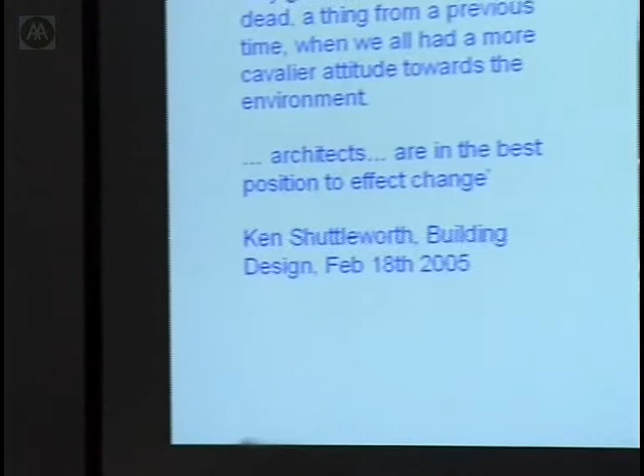We have a mountain to climb in terms of, really, I suppose, facing up or addressing this as an issue. And I think actually a large part of North American society is in denial.

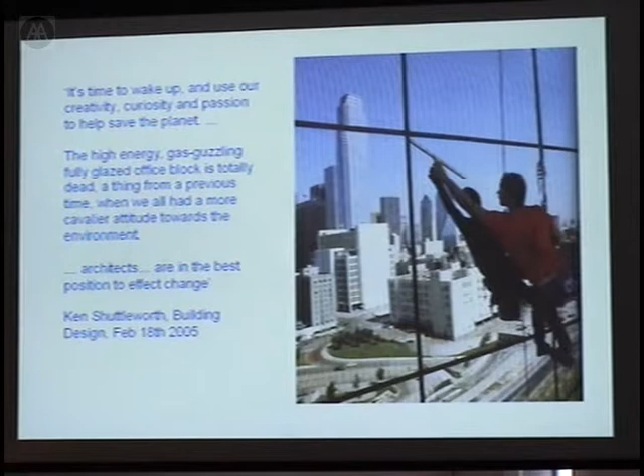Now, the statements from politicians really are rather jaundiced and, like many, rather cynical. But statements like this from a very prominent architect, Ken Shuttleworth, ex, of course, of Foster's, do encourage me, I think. Because here is someone who's very prominent and he's addressing some of the issues that we recognize as being problematic. We may not agree with his analysis, but at least he's saying something passionate about addressing the problem. And he, in this BD article, he ended up saying architects are in the best position to effect change.

But this leaves the question of how, and I think this is the main thing that I want to address, that very often we've been beaten over the head very professionally by Sue and Simos giving us a picture of the problems ahead. But the problem with beating people over the head is that everybody then ends up feeling guilty and inadequate. So rather than leaving people feeling guilty and inadequate, we must begin to address the issue of how we tackle the problem. Because we know architectural students, architects in general, aren't getting it. They're not getting it in general.

Why? Well, maybe it actually has something to do with us and in our approach to the way we impart knowledge and skills and how we crucially integrate this in the design process. And for me, the major issue is how we do integrate our knowledge and newfound skills into the design process. So how we improve knowledge and skills, we've got to, I believe, also promote an evidence-based approach to part of that design process. Now, this is anathema, actually, to many architects.

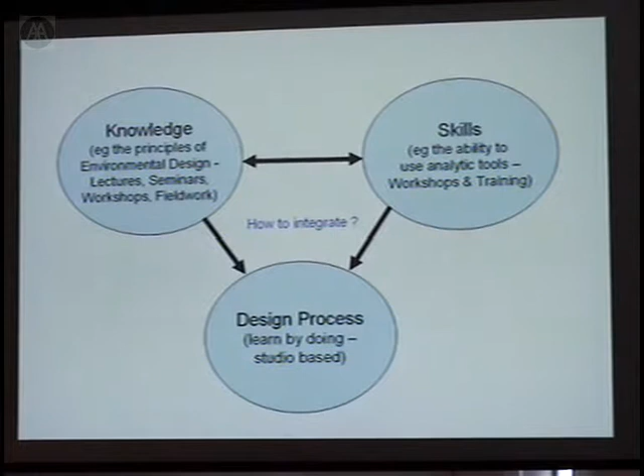And I say that also being involved. I'll come in a minute to a design module that I'm involved in at Nottingham. Anyway, my point here is that one of the critical issues is how we engage with the design process. The broader subject is what we might call sustainable design. I'm referring to what might be a part of that here in environmental design. And how do we integrate the environmental design knowledge and skills within the studio?

Well, firstly, like most design projects, we need to understand the context. I'll come on to a little illustration of all these points in a minute. We also need to understand profoundly the site and microclimate, and it's amazing how often both context and site and microclimate are ignored when setting design projects in the studio.

Thirdly, if we're trying to really understand the environmental design opportunity within a new building, then we need to define or at least understand the environmental design criteria which are pertinent to the problem. So, for example, what lighting conditions are appropriate for a particular activity? Not just the quantity of light, but what is the quality, perhaps, of the light that one wants to achieve in a particular space. And we need to have that up front. That's part of analysing the brief, really.

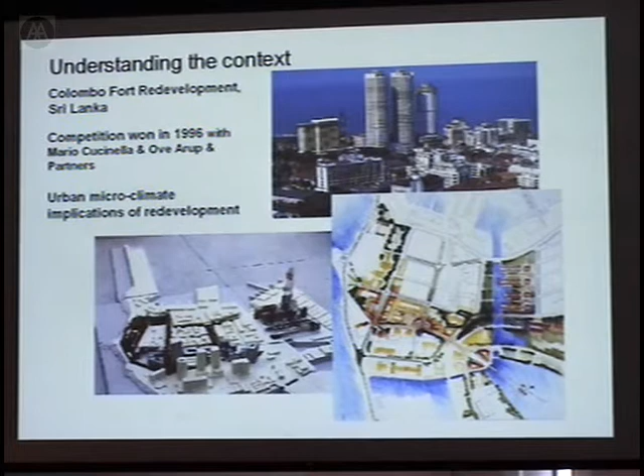Right, site and microclimate analysis. Well, yes, we do that, don't we? Or do we? Again, when we have a site, sometimes we see the perimeter as being bounded by the plot of land that the developer or client has identified, and we don't look at the wider site, which is, of course, the city environment.

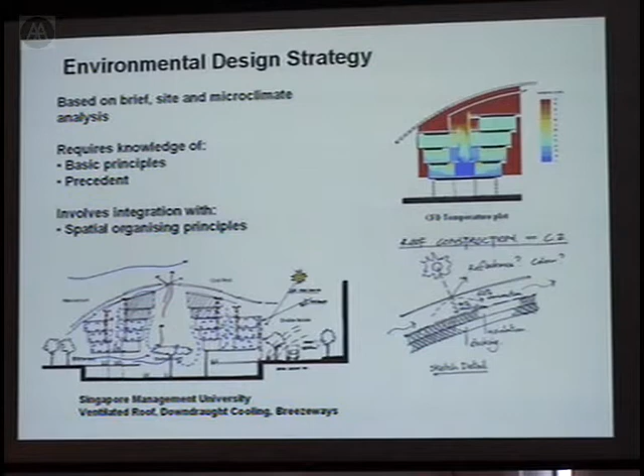So, we've developed, this is a highly hurried up process, but we've got our environmental strategy, which we're beginning to believe in. We want to test it and see whether it works.

Well, of course, now this is where all the tools that Simos and colleagues have been teaching you about enable you to begin to see whether the strategy works or not. And we now are very fortunate in having a fantastic raft of tools at our disposal in order to do this analysis.

Both of the individual building, but also at an urban scale. And increasingly, of course, this will be a very important part of your armory in persuading your client that it works, but also persuading the planners that it's going to be acceptable in the context of the wider city.

And this is becoming a more important part of the agenda, that planning authorities - and there was a recent publication of a sustainable plan for the borough of Newham in East London - but increasingly the London boroughs are mapping out the criteria for new development, and actually convincing them is going to be very significant.

So actually we are beginning to have more power on our side, that in practice architects are being forced to address these issues because it's a planning issue, it's a planning concern.

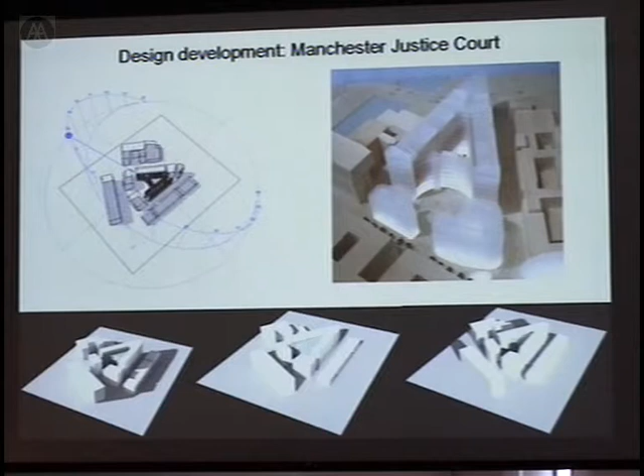So yeah, testing the strategy, design development. Well, this is a very quick run through, again illustrating a process of development in a project we worked with John Pringle and Pringle Richards Sharratt for the Manchester Justice Court.

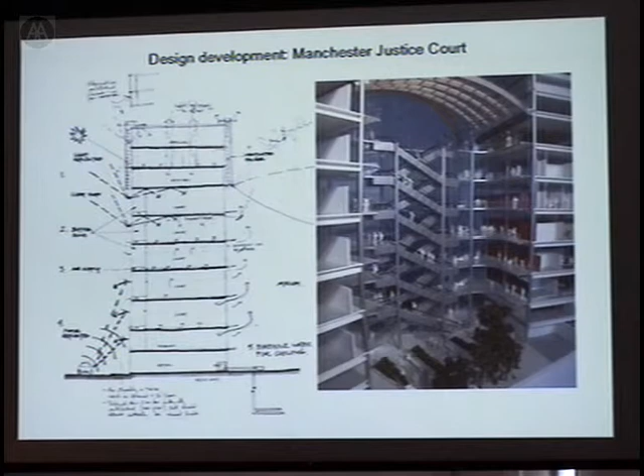Looking initially at the block modelling in relation to the site, how that affects shading, etc. Then looking a bit more detail at initial sketches of how we might respond to that context in terms of the density of the site, what we had to get on it, etc. Then refining that a little bit further - how do we get the air into the floor, how do we cross the building, how do we control sunlight, all those things.

And then further down to the individual room level, and then beginning to look actually at dimensioning it. And of course this process requires a great deal of commitment to the original strategy.

You have to hang on to it and fight for it, because progressively through the course of the structure people will nibble and nibble away at it, and you have to be convinced that your idea works, totally convinced, and you have to also completely convince your colleagues, otherwise it's not going to get there.

M&E engineers are going to come in and they want to fill, for example, this floor void. They'll want to fill the floor void with ductwork or something, or the structural engineer will. You've got to have all these guys on board, because if they're not, they'll find reasons for making it not work.

And my principle is - and I used to have lots of arguments with Alan Short about this, and it's painful and horrible, and you're nearly at blows with each other - he'd say it can't be like this. And I'd say, well, but it's got to work. And he'd say, yes, but not like that. And I'd say, but it's still got to work. And so gradually you kind of dance around each other, and then hopefully you get somewhere where it's beautiful and it works.

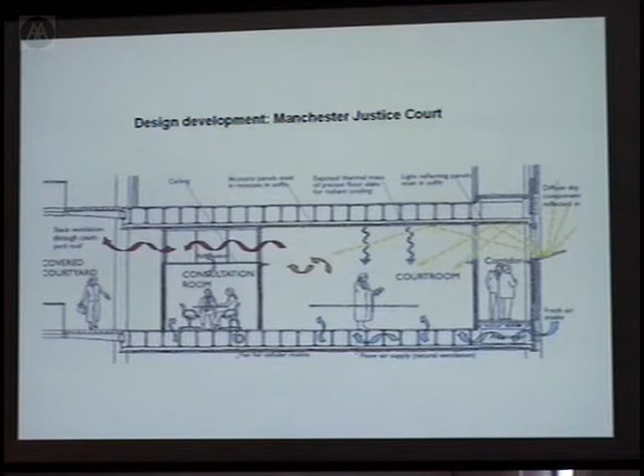Well, I suppose I've extracted this from our mission statement, which is a bit kind of strange, but we hope to produce - I hold my hand out - graduates equipped to meet the contemporary challenges facing the built environment professions. And we hope to have staff engaged in leading edge research, etc. Well, we do, and we are, and we do.

And part of that is a very strong commitment, and it is historical at Nottingham - an historical commitment to cross-disciplinary teaching and research. And so there's a very strong engagement of engineering and building physicists with architecture, and vice versa. So there is that strong engagement.

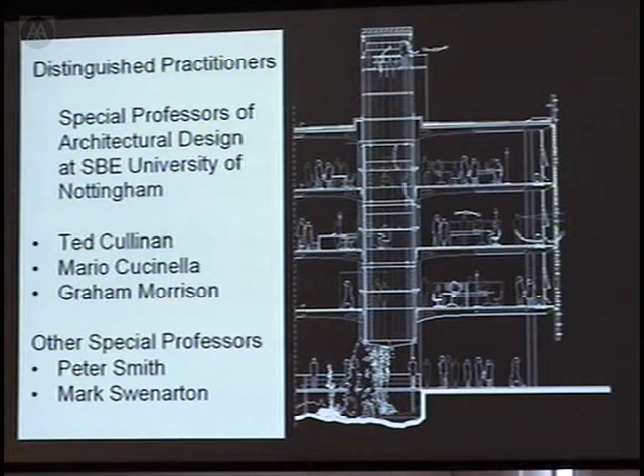We have also appointed other special professors to provide leadership in other areas of the school. In parallel with that, I feel it's fundamentally important that architectural education is grounded in or strongly linked with practice. I say that absolutely committed to that, because if it's not linked to practice, then we're in danger of going up a very narrow alleyway.

I've lost my thread a bit.

Links with the professions and industry, I think, are fundamental, because practice can inform education. It must. We're dependent on the engagement of part-time practitioners in the process of education, of course. But equally, I'm sure one reason why many practitioners do engage in architectural education is because they get a lot back. So it's a two-way process.

As Alexis was saying this morning, it's a combination of both theory and practice, and we need the two. But my strong belief is if it's too strongly theory-based, we're in big trouble.

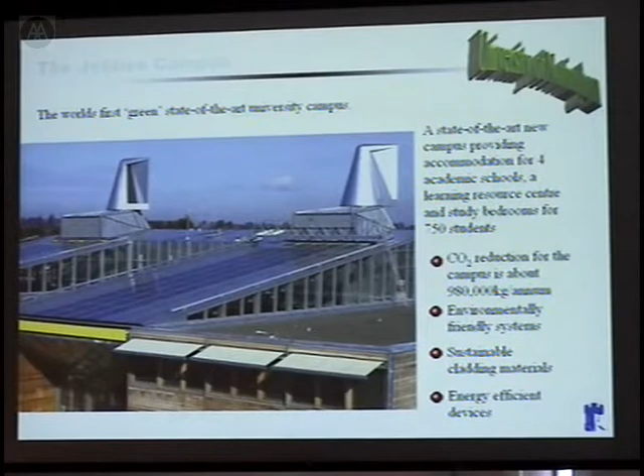Now, how much time have I? I've probably overrun, haven't I? Yeah, wildly, right. I won't tell you about the Jubilee campus, but you can all come and visit it.

I will just very briefly tell you about a symposium we're having on April the 5th, which addresses these issues in perhaps a wider context. We're looking at the implications of climate change and economic growth on the built environment in Europe and Asia, and that's on April the 5th, and I'd love to see all of you there. It would be great. Thanks very much.

Brian Ford was talking about the relation of practice on theory, and in Switzerland now there is a political trend to put theoretical research in universities and apply the research in technical schools. In this context, on the contrary, I would like to show the richness of working simultaneously on different levels like research, survey, monitoring, and teaching.

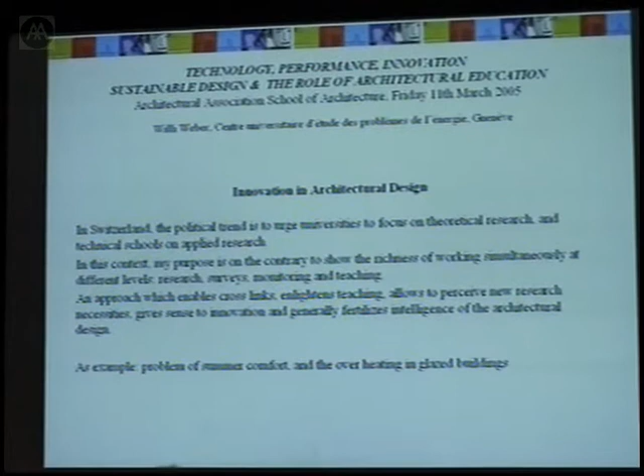So I will speak of our experience in CUEPE, the Centre Universitaire d'Études des Problèmes d'Énergie in Geneva. We have multidisciplinary people, architects, economists, physicists, and we are teaching in the Architecture School of Geneva, in the Faculty of Science sometimes, and also in the Academy of Architecture in Mendrisio. So it's nice, we see many students and have some experience.

And our research in the center is in the field of decentralized energy production, development of renewable energy, rational use of energy according to demand in buildings. But today I will focus on a very small problem: the summer comfort and overheating in glazed buildings, as an example. It's really a growing problem and quite interesting.

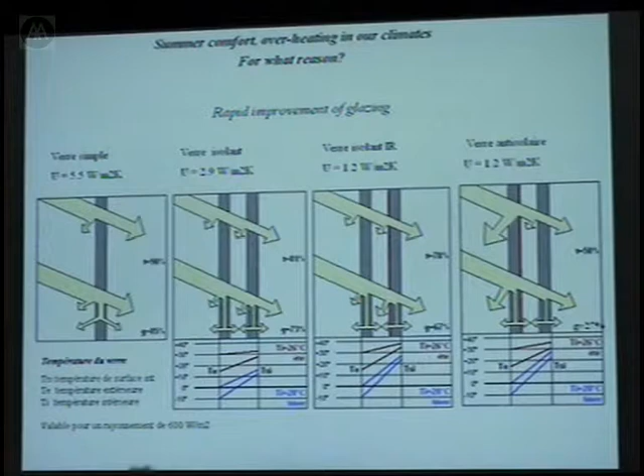And you know why glazed buildings are growing? Because glazing improved. In a few decades, U value went from 5 to 1, working on layers and so on, and also the facade technology developed and gives many possibilities. And also now students and architects are very fascinated by the transparency possibility in buildings, and that's wonderful architecture, but often gives problems in summer.

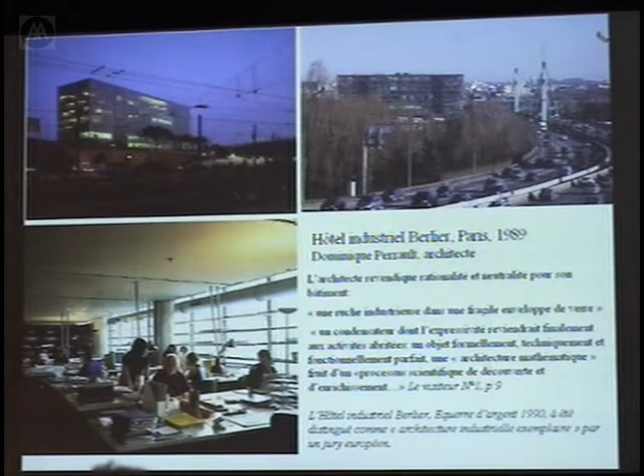And also I have to say that solar architecture was speaking of the advantage to put glass and to have gains in winter, and that's true, but now it's a problem of summer. I don't want to say that we don't have to use glass, and we can still build nice glass buildings, but first I would like to show why we have this problem, and maybe give some keys to be able to build nice glazed buildings that work in summer. For example, I give some examples that we had with students.

We have a postgraduate diploma in renovation, and one of the students took this nice building from Dominique Perrault. The text is kind of poetry of the beauty of this building. The problem is that people are complaining: overheating, glare, cold in winter, and now the building is half empty. They don't know what to do, but it's part of the architectural history of France, and difficult to do something with it.

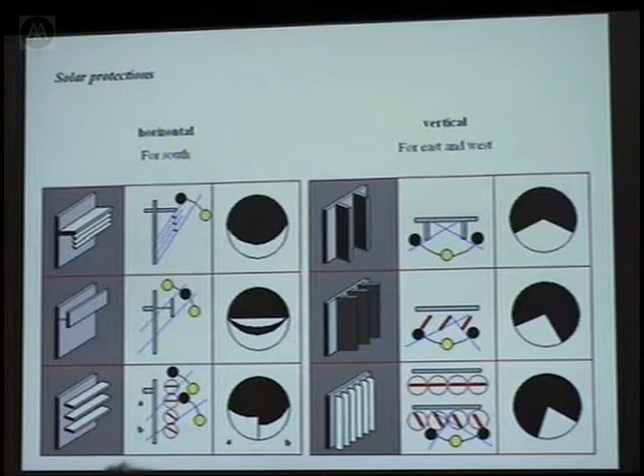And with Olga, we know that now for east-west you have to use vertical louvers and horizontal in south. And one problem is this building has horizontal louvers all over, on the inside of the building, so that's one of the origins of the problem. Just to show you some of the problems, we had to make a survey of, for example, this office building that had overheating problems, and the owner asked engineers, who said, well, no problem, we put air conditioning and so on, but first they asked us to look at the origin of this problem.

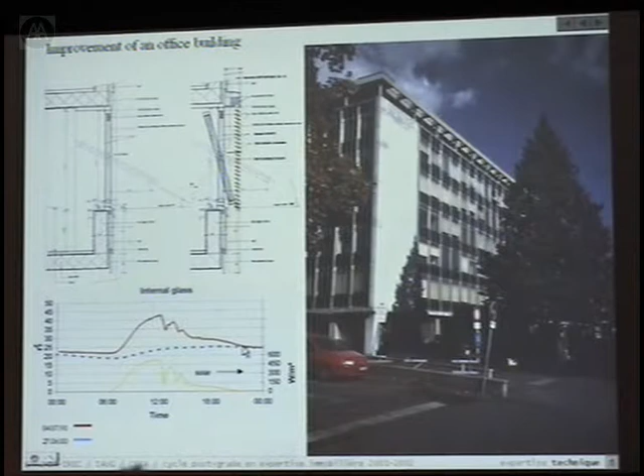Also, a building from Theo Hotz, a very famous architect in Switzerland at least, who is building many. Here is a dentistry building for the University of Zurich, and users are complaining. Same thing. He made both, you know, blinds between the windows, and horizontal louvers facing east and west. And here it's another case.

Interesting is a very nice building in Mendrisio with a nice integration in the site, opening on the garden and so on. It was built after a competition by Amr Soliman, and it is the last building of the Accademia di Architettura di Mendrisio from Botta. And inside you have also a nice atrium; here you see the roof of the main hall.

But also here, problems in the corridor: you get temperatures over 40 degrees during summer, and it really doesn't work. It's a real problem, and we had to make a survey. And it's kind of interesting to be able to work together, making measurements, simulation, and also use this information to teach students and have students in the building to see. And it was quite an interesting thing.

Well, some key factors: first, we have good glazing, we have now very thick insulation, and when solar energy comes in, then it's a real problem. So you have to avoid solar energy coming in, and the first thing is to know where problems can happen and to make some solar simulation.

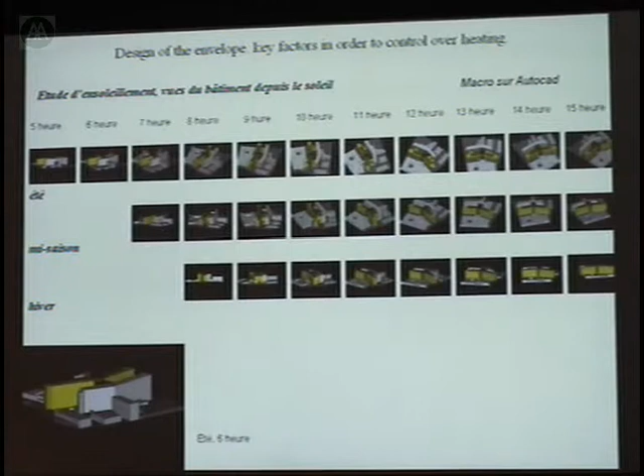Here it's seen from the sun, and we developed some tools, because if you take a northwest facade, you think, well, it's a north facade, no problem. But if you look carefully, you see that from 3 p.m. to 8, you have sun. You still say it's a north facade, but you still have 5 hours of sun during the day. So solar geometry is not evident.

So you have some little tools to understand, and that was also very interesting. It was a little building made in Basel, which kind of put together all new kinds of blinds and windows, so that architects can go and see how it works, how it looks. And one coefficient that is quite important for solar is called the G. It's the part of solar energy coming in.

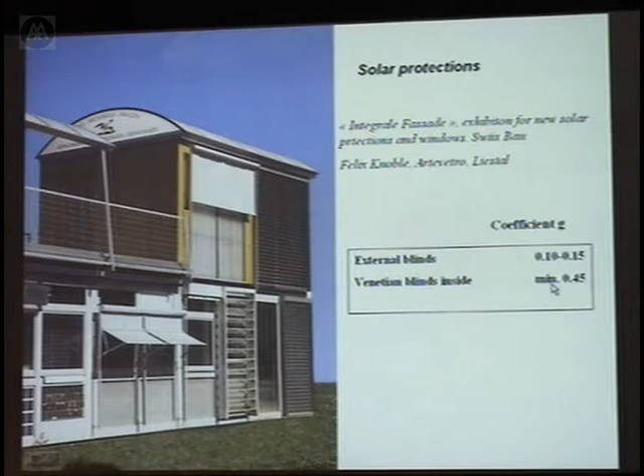And you see the difference between Venetian blinds inside and outside. That's usually what is demanded to avoid overheating, and the inside solutions are very difficult, even if it's what architects want, to have the purity of the glass.

And the G is not evident, because architects think what's important is the part of solar radiation that comes inside, but you must not forget that part of the solar radiation is absorbed, heating the glass, and part of the energy is coming in through radiation, part through conduction.

And if you see, engineers are giving which G value you have to have, related to the glass part of the facade. And it's really difficult. First, architects don't really know what this value means. Second, it's difficult to calculate, because you know the glass and you know the blind's G, but both together working, it's impossible to know. You really have to measure. So it's always having very precise values for something that you can't even calculate.

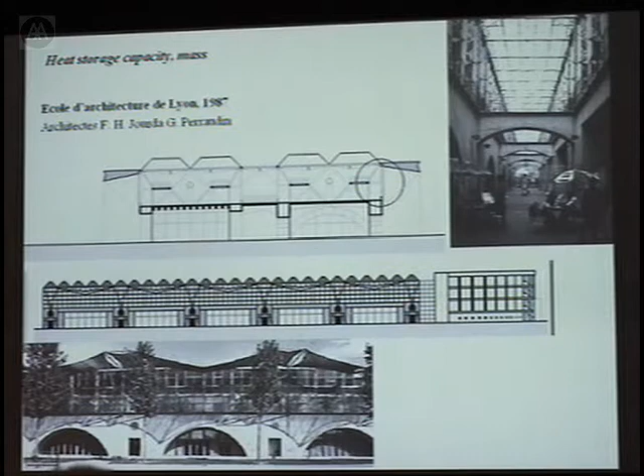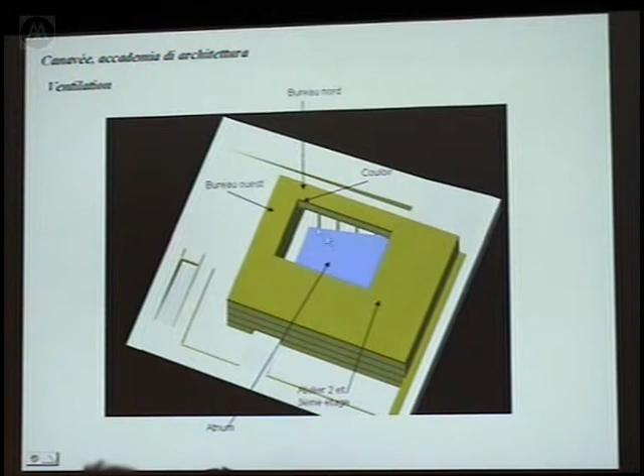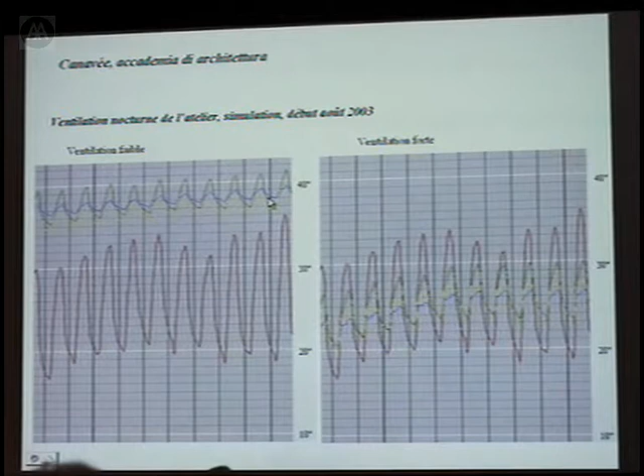Another important thing is ventilation. Going back to this house from the Accademia di Architettura in Mendrisio, we measured the studio and made some simulations that showed that with some solar protection and good night ventilation, we could very drastically lower the temperature. That's the main clue to avoid overheating in these buildings.

But it's important not only to show bad examples, but also good examples. We also tried to develop a database of nice buildings, not only glazed, but some that work. It's a database that you can find on the internet, developed in a European project called IDEA.

So the last thing is that with a good envelope you can lower or even avoid the demand for cooling, with passive solutions like preheating and cooling with earth pipes. And we measured an installation in this complex in Geneva, where you had many things: solar roofs, these earth pipes and so on.

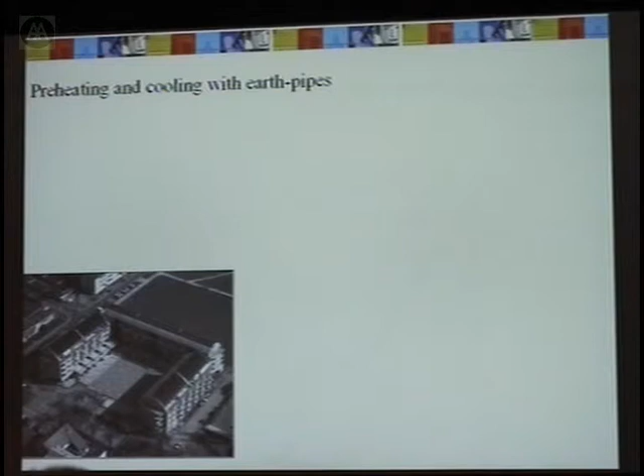Here it's just to show in this example the relation between theoretical and applied studies. You see the installation of this earth pipe, quite important, impressive and expensive. And you always have to know there are two main solutions: working with the average temperature over a year, or the average temperature over a day, and it's a very different dimensioning of systems. Often there's confusion about which systems are used.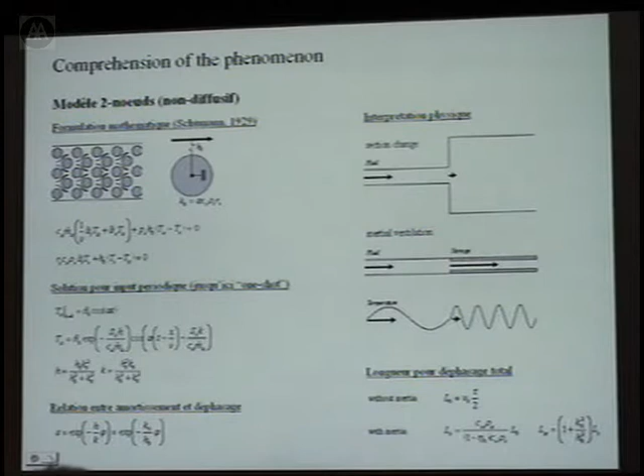And coming back to this, first, a thesis was really a mathematical and analytical study of this problem. What's interesting is to come back with some simple rules to dimension. Here are some simple rules for the surface of exchange per cubic meter of air. The one thing is to know if you use the yearly average or the daily average.

The second is, do you use this system for preheating or for cooling? It's not the same thing, and we saw that preheating, with the good heat exchangers that you now find, is not so interesting, but for refreshing you have no other solution. So we prefer to dimension this especially for cooling.

And then going from this, the idea was: we always work now with the average temperature of the day. Why not try to have the lowest night temperature for the day? The mathematical work in his thesis showed maybe a possibility, and the idea was to make this phase shifting, you know, to use during the night the external temperature, and then during the day the air from the night given by this shifting. So you always have, day and night, the lowest night temperature.

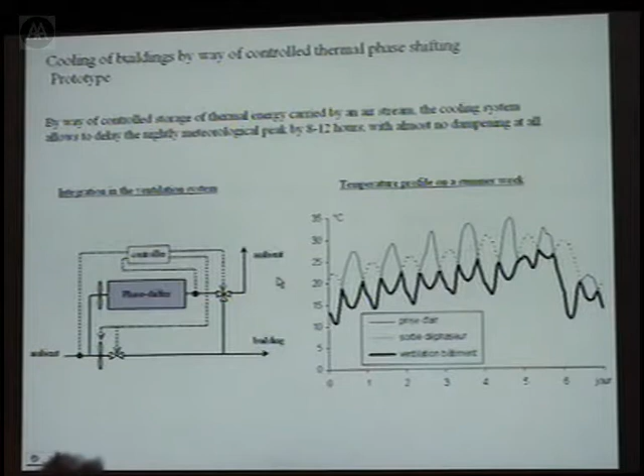And we developed some tests, and it seems to work, but it has to be very careful because you have very precise exchanges, many air exchanges, and also continuity of flow. So we could develop this and also apply it to renovation. That would be quite interesting.

Well, conclusion. I think we should not split, and always keep a relation between applied or practical experiences and theoretical research, because it goes back. In this last research, we saw that many theoretical points about heat exchange had to be studied again. It could maybe be the subject of a new thesis. And also, to be able to involve students sometimes, looking at what's happening, how you measure, what the problems are, is quite interesting.

So for this problem, Alexandro was talking yesterday about medicine, like you are the medicine of this problem of overheating. I had to find some medicine to avoid problems or in some cases to lower this.

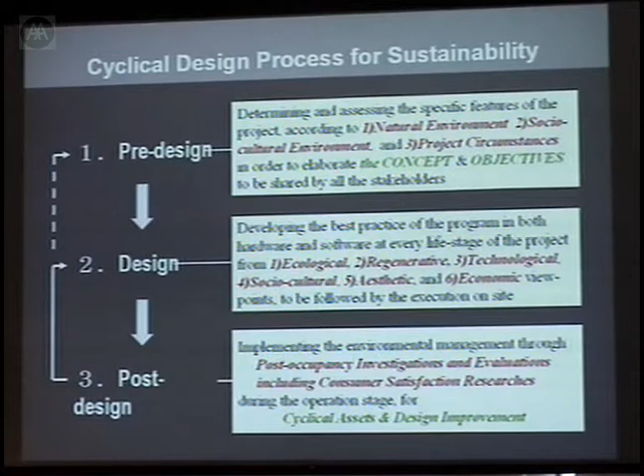So after this design phase, which to me is very important, I work with the students very often, implementing environmental management through post-occupancy investigations and evaluations, including consumer satisfaction research. That is very, very important; we can learn a lot from this phase to improve the design and also the pre-design phases. So this design phase goes back and goes around in a spiral way. So this is our fundamental attitude towards the architecture of sustainability.

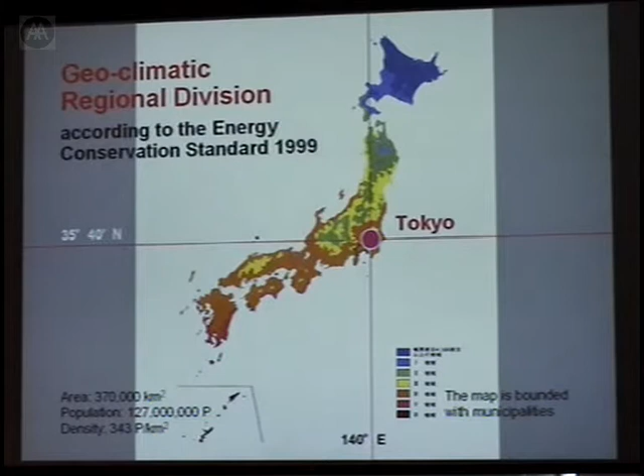I don't know if the people here know about Japan, so I'd like to show the general characteristics of Japan. This is an archipelago, stretching from north to south, and we have a lot of different climate zones, shown here. It is defined by the national energy conservation standard of 1999, and it is bounded by the municipalities. So we have semi-Arctic to subtropical regions like this. And I will show you today 10 examples according to these zones: northern zone, intermediate zone, southern zone. Tokyo belongs to the intermediate zone.

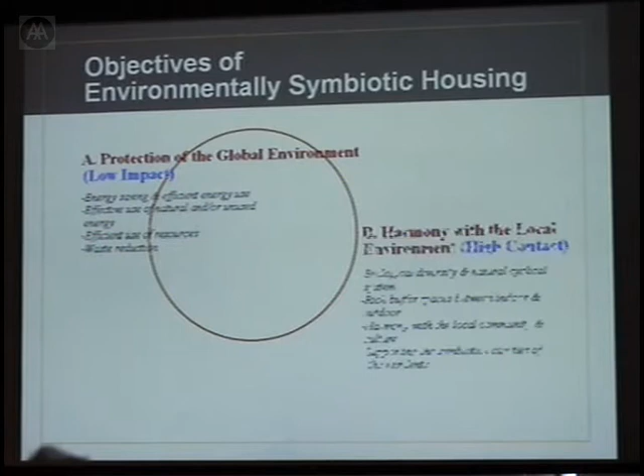So part one, residential case illustration. I'd like to introduce a very important national policy drive since 1990, which is called environmentally symbiotic housing. I have been a major consultant to the government since 1990, 15 years. The objective is, first, protection of the global environment, which we call low impact. Secondly, harmony with the local environment, which we call high contact. And thirdly, a healthy and comfortable living environment, health and amenity, which is very popular all over the world nowadays.

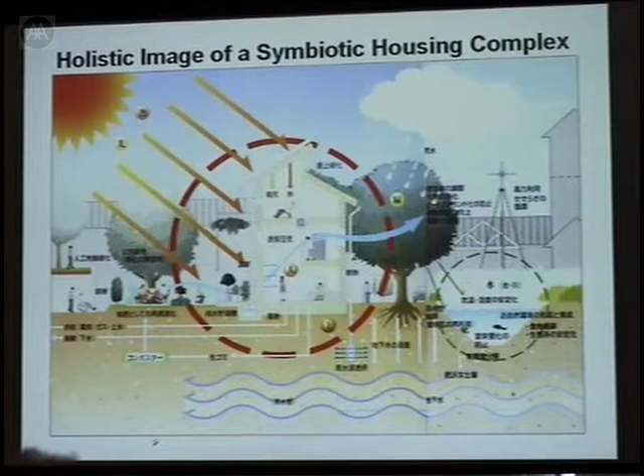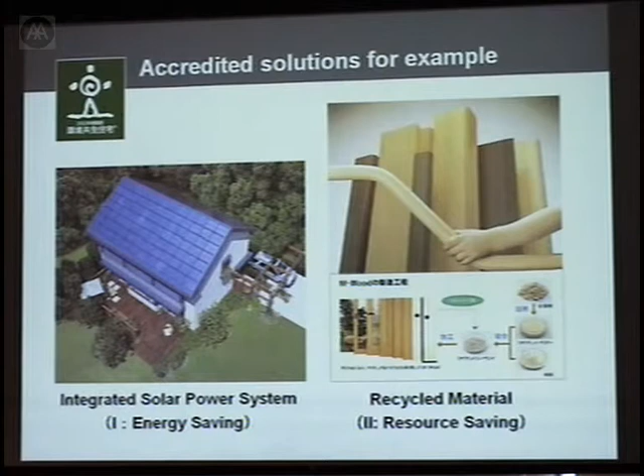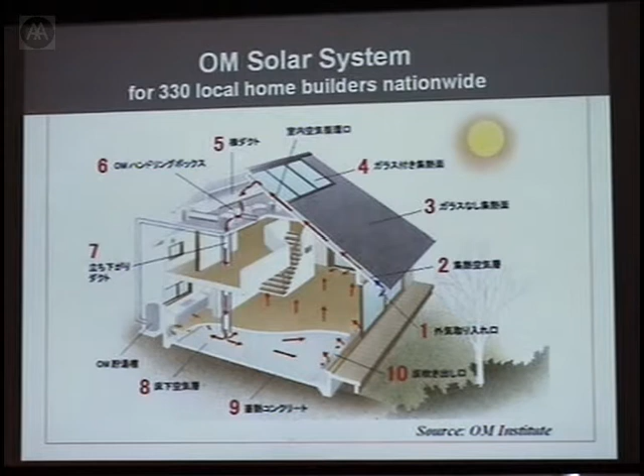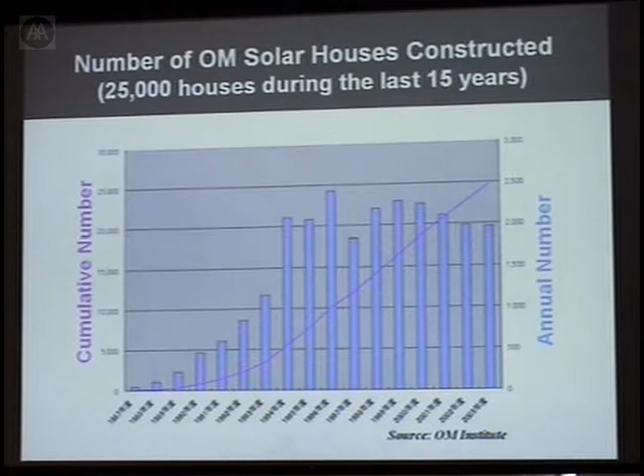What is really interesting to me and very important in Japan is the OM solar system, which was created by one architect 15 years ago and is now put into operation in the market. It's very popular now. It is a very simple system: the air comes from the bottom of the roof and goes up and heats up through the roof and the glazing on the rooftop. Then it is propelled down to the cavity floor and accumulates on the slabs. Then warm air comes into the interior, and in the summertime it can also be used for hot water. The number of OM solar houses constructed during the last 15 years is more than 25,000 houses, an incredible number, and it is very well welcomed by the people in Japan.

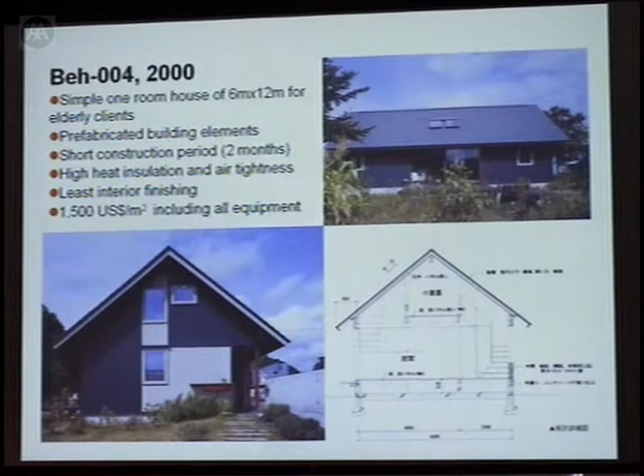So now some case illustrations in Sapporo, here, the northern part of Japan. This is a close friend of mine, an architect. He developed this prefabricated system, a timber house called Beh house. It is very affordable, with very high performance in terms of insulation and so on. It can also be built within 2 months, very quickly. And the users and customers can participate in the construction. This is also a very important aspect. Well, look at this.

Prefabricated building elements allow the parts to be built. Well, anyway, this is very affordable in comparison to the normal Japanese construction method.

So the second example is my project, which is the Setagaya-ku Fukasawa Symbiotic Housing Complex. This is public housing which was constructed in 1997. Public housing is subsidized 100% by the state, the government, the prefecture and the municipality.

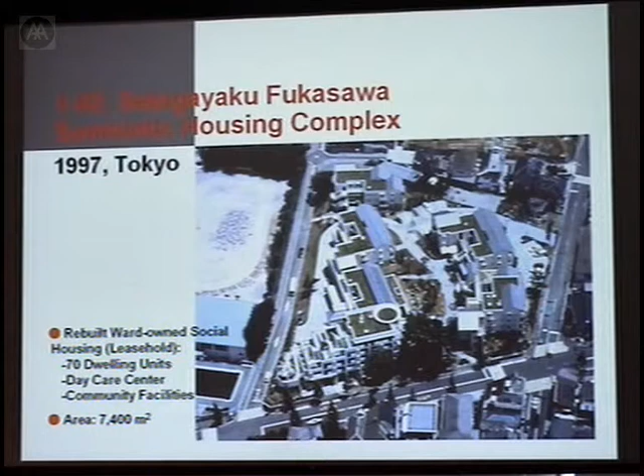And this is also rebuilt, publicly owned social housing. This is a leasehold, with 70 dwelling units, a daycare center, community facilities, and so on. So this is the situation before the rebuilding, a 50-year-old post-war community environment.

And in this project, what was very important was the social aspect. So we tried to make a participation program for the people, embedding the memories together. So you see the people working together, people from the municipalities, from the office, residents and so on, and it later became a part of the environment.

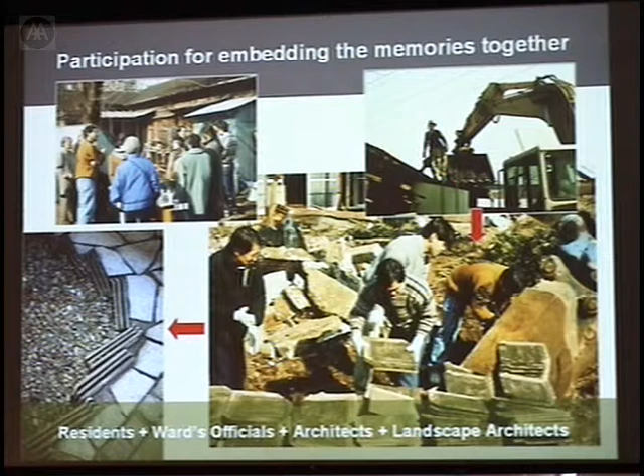And this is a very important aspect, because after completion, if the residents participated beforehand, they take care of the house very, very carefully. So that could be very sustainable for the building itself.

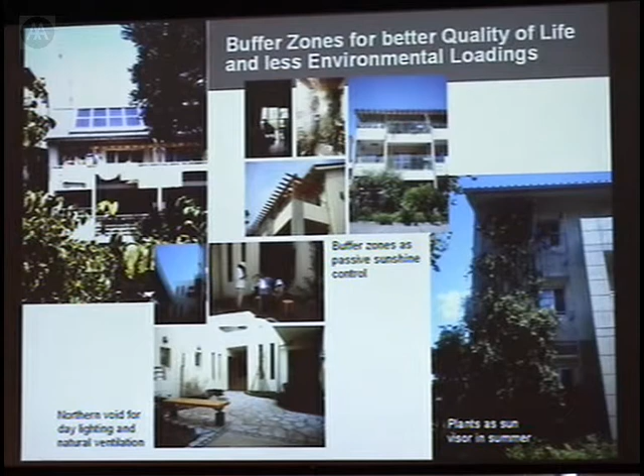So another aspect of this building complex is the buffer zones, which to me is very important in the Tokyo area for the local climate, for better quality of life and less environmental loading. I don't go into the details, but I also put greenery on the rooftop, and this is some aspect of the post-design.

We made it together with the students in the university: how does it work, how doesn't it work? If it doesn't work, we have to remove it, improve it. All the stuff is very, very educative for both teachers and students as well.

So at last, this is the CASBEE score. This is the new Japanese assessment system based upon BREEAM or LEED and whatever, but which conforms to the Asian context. What is very characteristic is this graph here: horizontally is building environmental loading, and vertically building environmental performance.

So we have the BEE, building environmental efficiency, Q by L. Q is quality, L is loading. So all these factors, indicators, are sorted according to Q and L. We can show every indicator, Q1, Q2, Q3, like this in the bar graph, and all together like a radar chart.

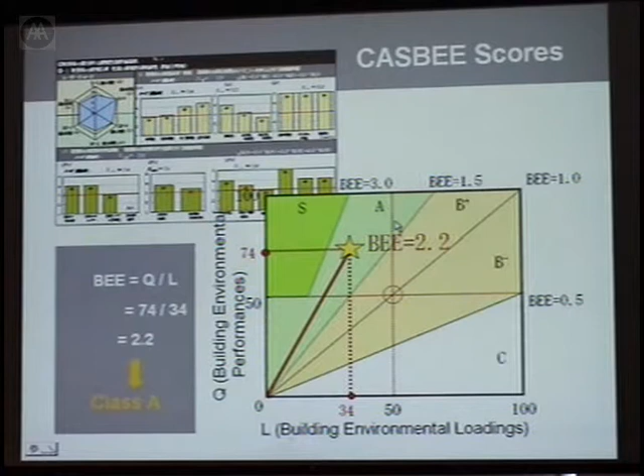And then at last, we have this number BEE, in the case of Setagaya, 2.2. So this is quite high. And of course, less building environmental loading and higher performance means better buildings. So S is the best one, then A, B plus, and so on. This is the classification of the assessment, and this building belongs to A.

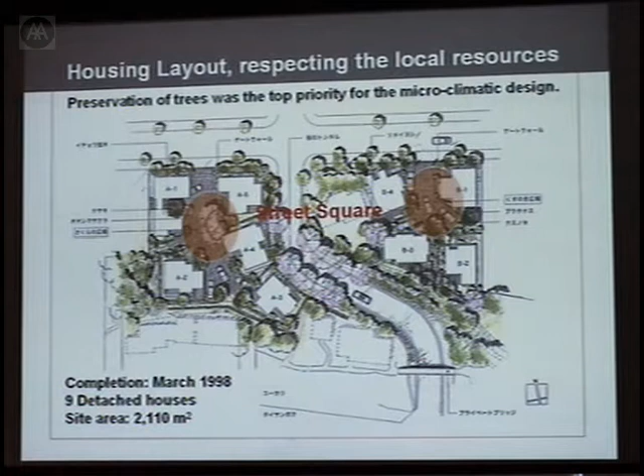So another example is also a residential complex, which refers to microclimatic design using existing trees. How do existing trees function for environmental improvement? So this is some post-design assessment here using infrared photographs.

And what I'd like to talk to you about is this comparison, case 1 and case 2. Case 1 is the trees are preserved, case 2 is not preserved. So you calculate the heating load and the cooling load on the houses, and for the first year, you have here electric power consumption and then CO2 emissions.

So after 50 years, using the existing trees as a design aspect for microclimatic design, a 52% reduction will be provided. So this is the sort of research which was designed by the architect as well.

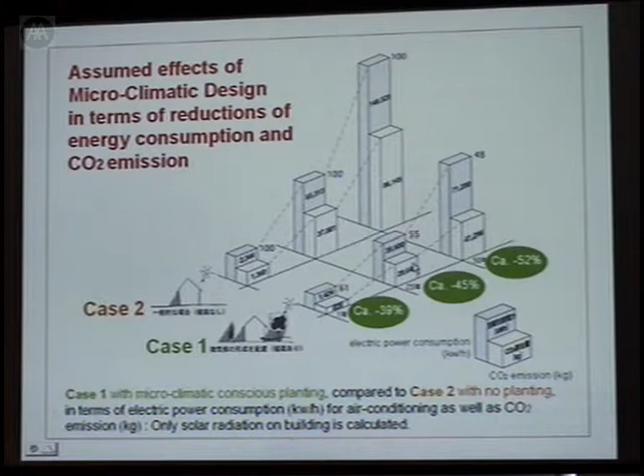So another is my other project, Yakushima Symbiotic Housing, which is a totally different situation from my preceding project, and which is also publicly owned social housing, leasehold. And this is on a small subtropical island like this. So this is a typical housing block, which learned from the rich vernacular heritage that you see down here on the right.

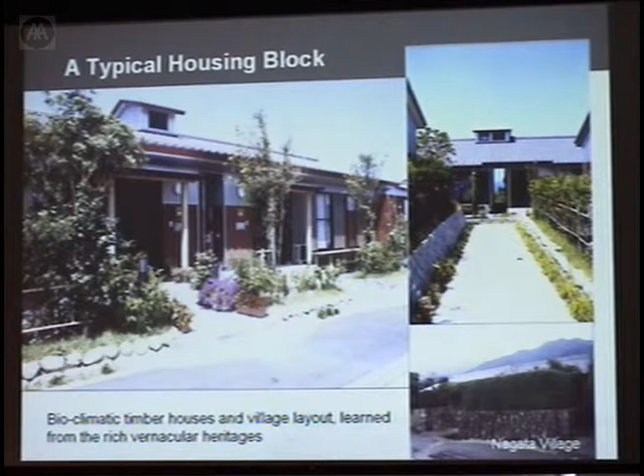So in the traditional closed layout, houses protect each other against the typhoons, and an open interior providing flexibility and natural ventilation is the priority. Here we have a lot of typhoons, more than 10 every year. That's why we should consider the form of the houses. So it is intentionally closely laid out, based upon vernacular solutions.

So next one, this is also a very important aspect in village scaping, and this is the overall image of the ensemble, which is totally different from the Tokyo examples.

So for non-residential case restoration, I have no time here anymore, but let me explain one or two examples.

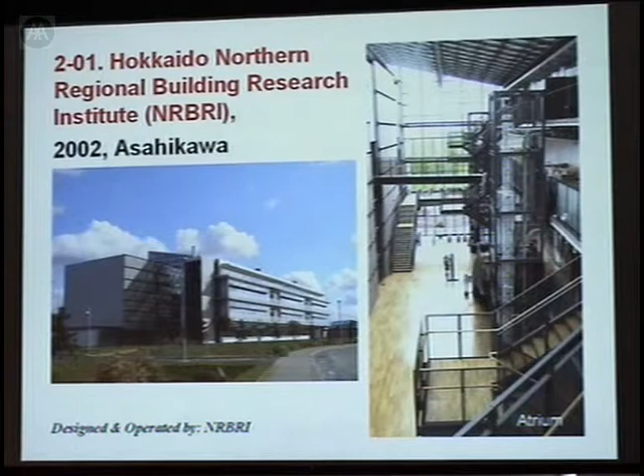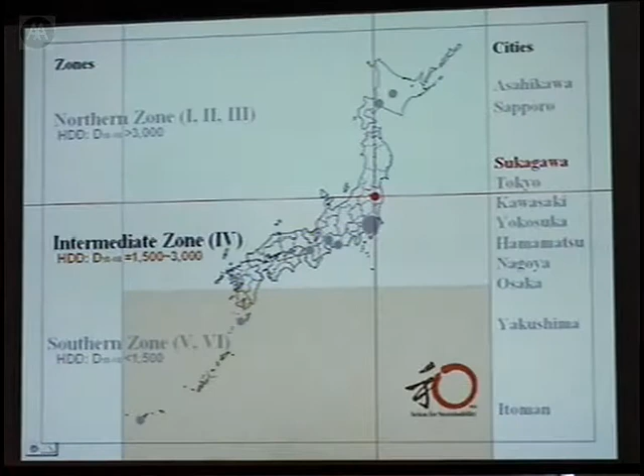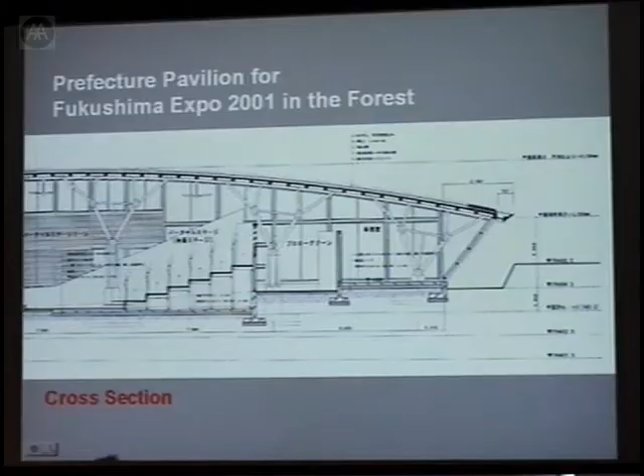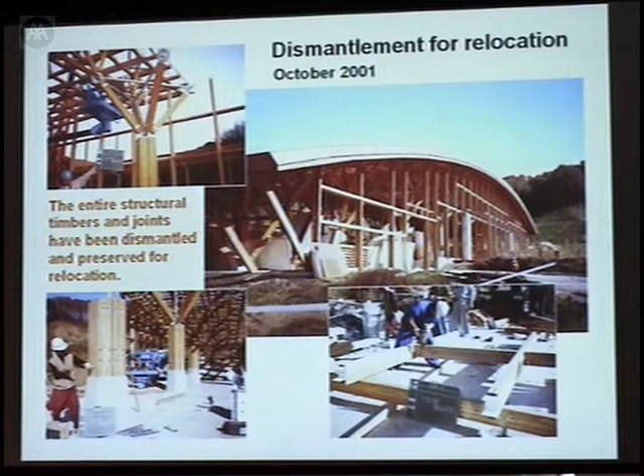Another example, also my project, is a pavilion from Expo 2001 in the forest, which was a timber construction. A pavilion for an exposition is usually destroyed afterwards, but this time we tried to remove all the construction and relocate the building somewhere else. That's why we rationalized all the details like this, using ordinary timber from the market, not special timber. It was a green building, with interiors like this during the expo, and afterwards it was dismantled and relocated elsewhere for permanent use.

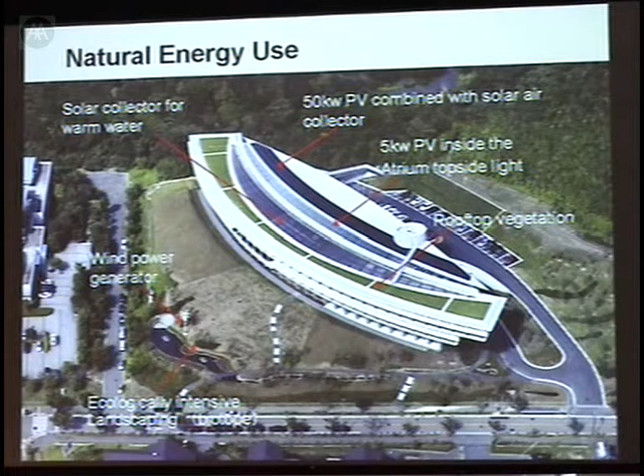Another example is perhaps the most advanced environmental building in Tokyo, though I think it's a little too much. Anyway, this is a good example, also done through competition. They have every kind of gadget attached to this building, but what's very interesting is the passive solar energy.

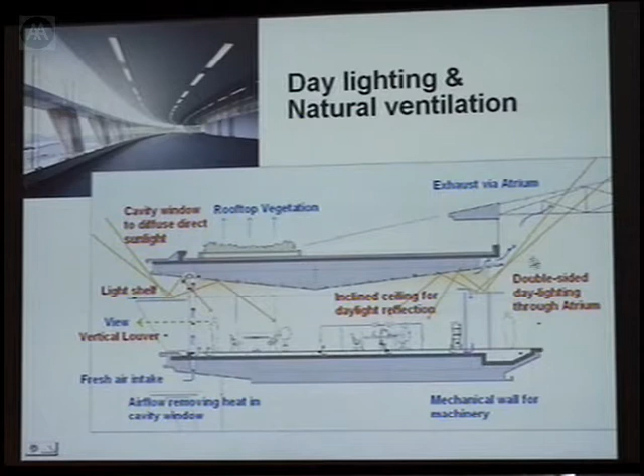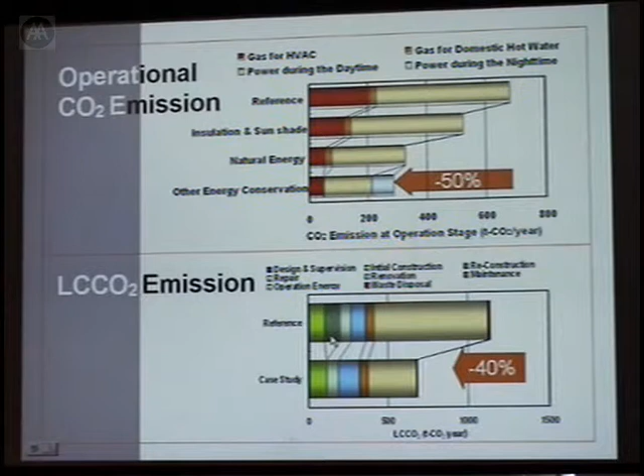For instance, this is a geothermal cooling and heating system using an underground gallery, and there's also an atrium, which is very popular in Japan. This is an understandable illustration of natural daylighting, from the south and from the north as well, and also this light shelf, integrated into the architectural design as a vertical louver. With all this gadgetry, they reduced operational CO2 emissions by 50%, and LCCO2 emissions by 40%, calculated like this. The CASBEE value is 6.2, which is very, very high.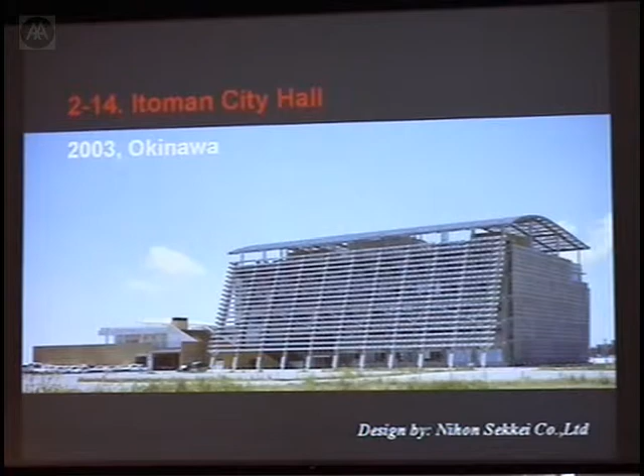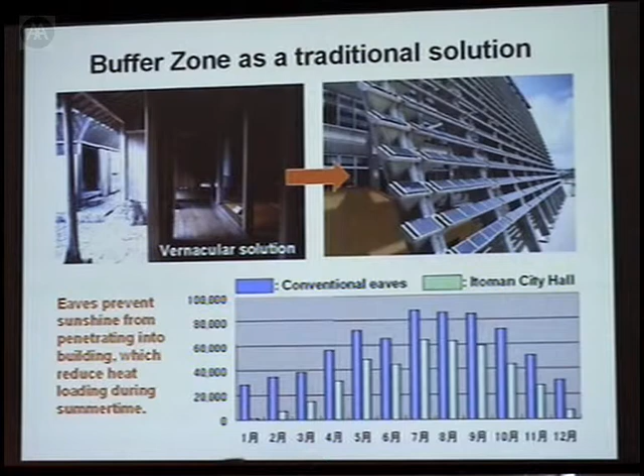I'll skip this project and go to the last one, which is very characteristic of southern Japan. This is Okinawa, a very large island in a subtropical area, also built through competition. This is City Hall, Itoman, where the most important aspect is how to make shadows for the buildings, along with natural ventilation and so on. You see solutions like this, also using photovoltaics, based upon vernacular solutions interpreted into the new design. Through these measures, operational energy saving is a 20% reduction.

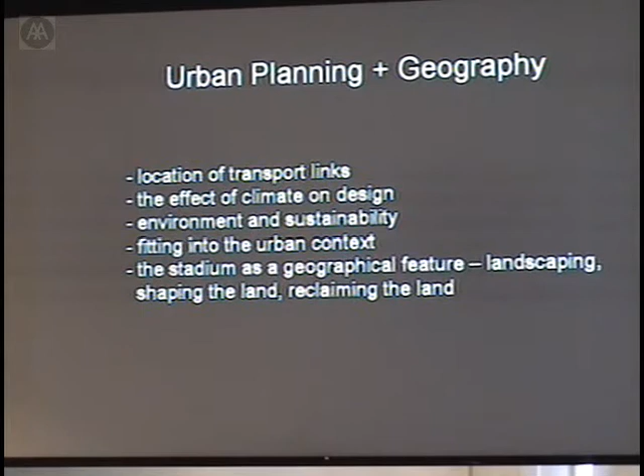So what I'm going to show you today is a complex subject. Urban planning and geography links all of these things, as we've heard so many times today, to bring together what we mean by sustainability. And all of these five are interlinked. They are not in compartments.

I'm going to talk today to you about my experience. The stadium and the arena are very large and important spectator venues. Somebody calls them the new cathedrals of our age.

So what does Wembley do about meeting sustainability? It complies, of course, with all of the Part L increased futuristic regulations. Dean told us about a house that he built which was in advance of the regulations, and Wembley is going to be in advance of the regulations too.

The power will be supplied from renewable sources. We are going to separate the wastes for recycling. The crushed concrete of the existing building will be used in the foundations of the new building. The building has been designed so that it's what we call cut and fill, so that very little material from the demolished building left the site. We save on a lot of vehicles being transported all over London, so we built in as much of the old building as possible into the new.

And of course we come to public transport, which means there's no car parking here. This is a city centre building. Just to show you the scale of the problem, the red profile shows the size of the old stadium on the same site, and the black building shows the profile of the new building. This seats almost exactly the same number of people, but to a much higher standard of comfort, dimension and safety, providing for disabled people and all of that. So that's the comparison between the new building and the old.

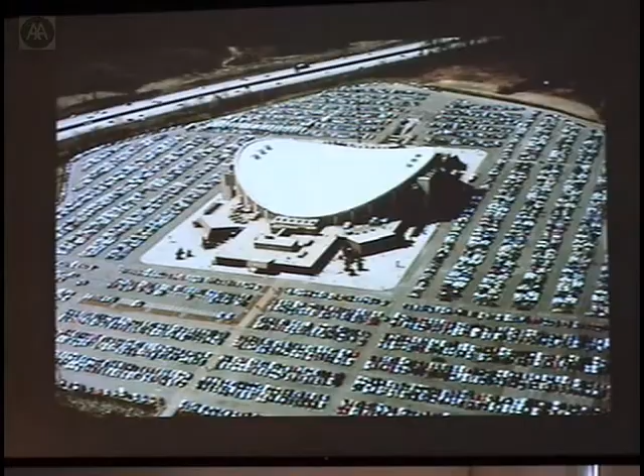This is an American example of something we don't want anymore. We don't want to build stadiums and arenas like this, surrounded by car parks, using vast amounts of energy to get people there, big traffic jams, big road networks. We want now to concentrate on having public transport.

Afterwards it was changed to meet a different need, because it has to be sustainable in terms of its use afterwards. Some of these things show you what we did about the design in terms of sustainability.

We used the water from the roof, collected together, which is going to be used for grey water, flushing toilets, washing in the stadium, and of course watering the pitch.

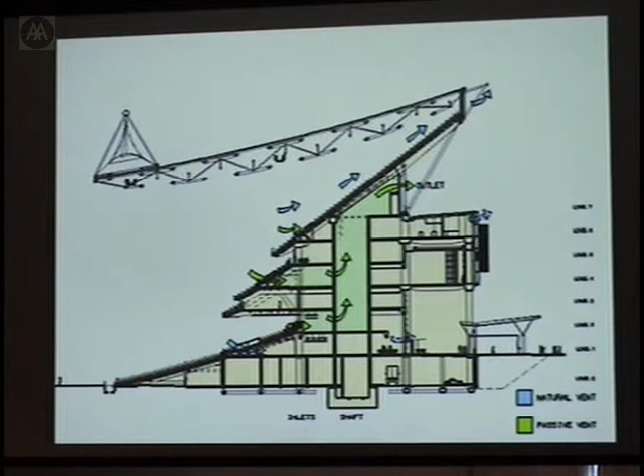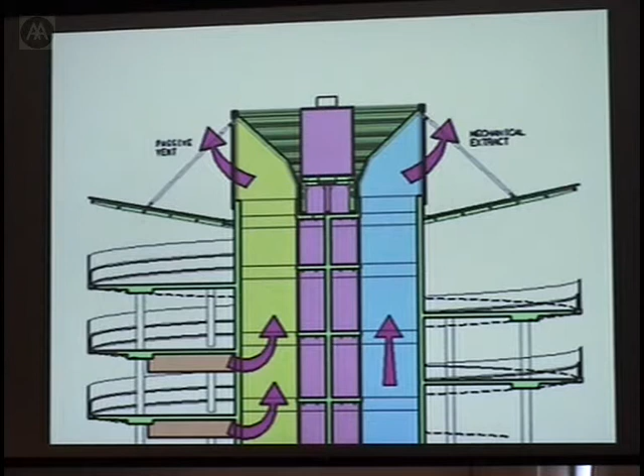We designed the building to try and avoid using air conditioning as much as possible, by designing it so that natural ventilation provides as much airflow, avoiding the use of complex and expensive air conditioning machinery. This is one of the ramps to the building, again built into the system to try and get air moving through the whole stadium to provide natural ventilation.

This is an example from Germany, showing solar collectors on the roof of the stadium, providing all the energy that's needed. In the previous presentation, we heard about an atrium—this is the new racecourse at Ascot, which provides an indoor atrium, again improving the energy performance of the building. This is the new Arsenal Stadium in London, also under construction, built on a brownfield site.

All the timber will come from FSC accredited renewable sources. We avoid the use of PVC in any materials that are used in the building. These are the kind of practical things, instead of the global messages, that we can do. These are practical detail matters that can be applied to the buildings.

We are going to use only water-based treatments for timber without any kind of pollutants in them. We are going to process the waste from the building. And there will be zero use of additional low formaldehyde MDF. And MDF is a very controversial material now, and so we're going to do it the best we can.

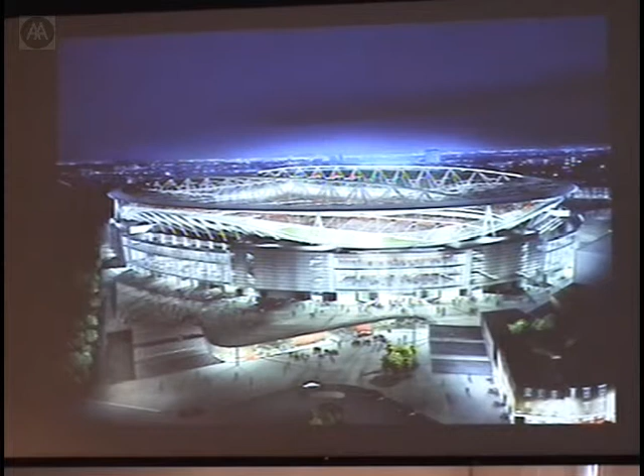And once again, transport. To this site, it will be public transport using the public transport network of London. No car parking. Nobody's going to come by car. Everybody will come by transport. And the lighting of the stadium is very good.

Now this is another aspect of sustainability. It means multi-purpose use. It means that this building does not lie idle. It can be used for many, many purposes. For concerts, and people can be protected from the weather when the roof is closed.

It's quite old, but is still, to me, one of the finest examples of an Olympic site that's ever been created. And it was done by reusing materials from the demolition sites around the city after the war. They built that hill out of materials that were brought to the site. The site was shaped in a very, very nice way, and it's in advance of current thinking, but nevertheless I think it's a kind of example that shows us what we can really do.

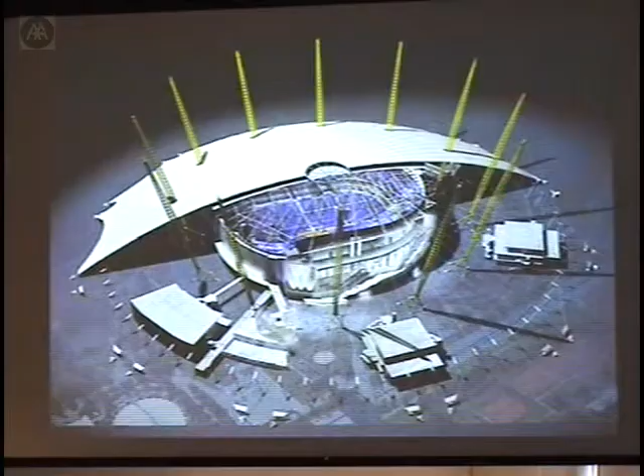This is a building with the outside skin by Richard Rogers, in which we are now, it's the Dome, the famous Dome in London, built for the millennium, and now we are inserting a permanent arena inside this building, which means that the building has a long life and has a new use to it, which again is a kind of reuse of existing buildings, and means that we are going to make the best use of existing buildings which last for a long time and give user satisfaction.

And I hope that what I've said to you in a way gives you some clue about not just the kind of wide global theories, but some of the aspects of how buildings can operate in practice and how we can deal with some of the problems which take us towards a better environmental solution.